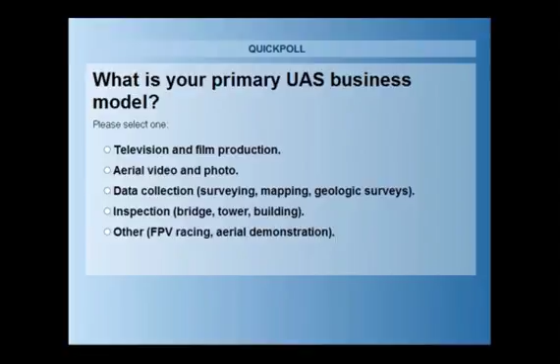So I'm going to close out this poll, and it would appear that over half of you are involved with aerial photo and video, closely followed by 22% in data collection, survey mapping, and then it's spread out evenly among the other, bridge and tower inspection, and television film production. Good stuff, thank you for taking the time to do that poll. We'll have a few more as we go through.

So briefly, we want to go through a little bit of the history of why we got here. I'm not going to go into significant detail, but what I want to bring up is that UAS operations aren't new. They've been around a long time. Quite frankly, you can go all the way back to the 50s and 60s when you look at RC-controlled aircraft. Where it really became popular was in the 70s. You had folks building these from scratch or designing them from kits in their basement, and they would generally form clubs, go out and operate in sparsely populated areas in a club environment. And this worked well for a really long time.

In fact, in 1981, if you take a look at that on the screen, that's Advisory Circular 91-57. Currently we're on Advisory Circular 91-57A, which is kind of the rewrite of this. But all the way back in 1981, the FAA issued this saying, hey, we recognize you guys are flying these aircraft in the National Airspace System, and they're model airplanes, and you're staying away. So we came up with some guidelines and operating standards, not a rule, but certainly some standards that we expected folks to maintain in the RC community. And that worked well. It worked well all the way up until rather recently.

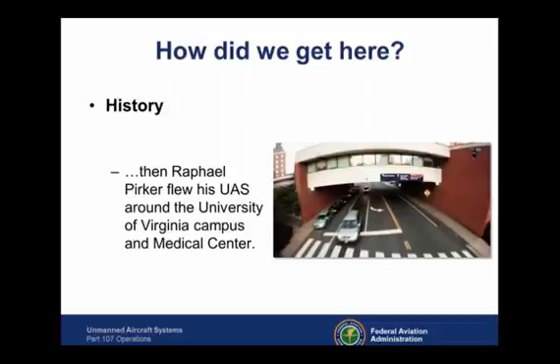That's not necessarily why Raphael Pirker got into a situation, but this is kind of what kicked it off. Mr. Pirker operated his UAS around the University of Virginia campus and medical center, taking videos, swooping underneath and over and around heliports. That's what caught the FAA's attention. And what ended up happening is the FAA charged him with violating quite a few rules under Part 91, based on the fact that we were stating unmanned aircraft systems, or UA, are aircraft.

And of course he fought that and said, no, it's a toy, it's my hobby. So we lost in the lower court. The lower court judge says, yeah FAA, this is a toy, it's not an airplane, you have no standing. Well, the FAA appealed that. It gets up to our highest appellate court, which is the NTSB.

The NTSB affirmed the FAA's position that unmanned aircraft systems are aircraft. That's really the key decision we have right now, and how the FAA got involved in all this anyway. I'm not going to debate this—I know there are probably lawsuits and differing opinions on it, but the facts as it stands right now for law, unmanned aircraft systems are aircraft. You can reference that NTSB decisional order there with FAA versus Pirker.

Shortly after that, Congress enacted a law, the FAA Reauthorization Act, or Public Law 112-95. This captured a lot of UAS hobby operations in it. One of the requirements of Public Law 112-95 was that the FAA establish a means for people to operate UAS commercially in the National Airspace System.

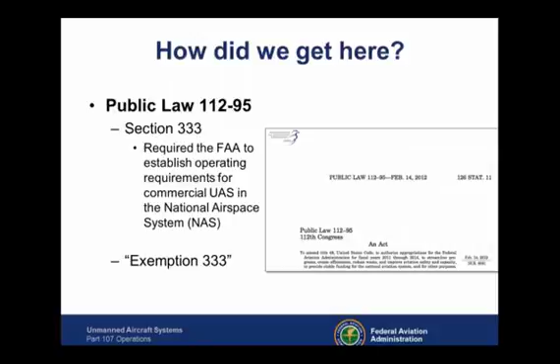The law goes into effect. FAA law doesn't trump congressional public law—it works the other way around. So we had to come up with a rule, we had to come up with something right away, and that's where you got the exemption process, Exemption 333. That was our bridge from Public Law 112-95 all the way over to Part 107 operations. Many of you attending right now may have 333 exemptions, and that was part of that process.

Now, as of August 29th, we have FAR Part 107. This provides for civil, which in our discussion here means commercial, UAS operations in the NAS. It also certificates remote pilots. So that's where we're at here today.

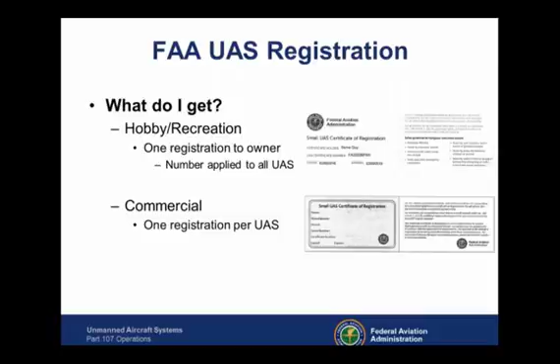Registration is $5 and it recurs every 3 years on your UAS.

So what do you do when you get that number? You have to mark your UAS. No, you don't need 12-inch N-numbers on the side, but somehow that UAS has to be labeled—permanent marker, engraving, any means that will permanently identify that registration number on the UAS. The key with the registration number: it has to be readily accessible, maintained in a condition that is readable and legible upon inspection. You can put it in an enclosed compartment, but only if it takes no specialized tools to get at it. If it takes some sort of unique one-in-a-million screwdriver hex head to open that compartment door, you can't put it there. We're talking tools available to just about anyone with a home repair kit—they have to be able to get at that.

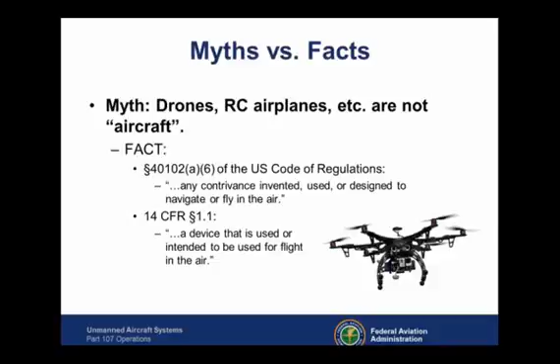I always get somebody in the audience at some point during my live presentations asking, 'So paper airplanes are aircraft and they have to be registered?' That's ridiculous. No, paper airplanes are not aircraft — they cannot navigate in the air, and that's a key part of that. When we get into kites and balloons, we have rules specifically for those, but we're talking about devices used to navigate or fly in the air. They have to be capable of flying in the air. A paper airplane doesn't meet that requirement.

This came up just recently. It's a hot topic, and it's really interesting because it's not unique to remote pilots — it comes across all avenues of pilot certificates. The myth is remote pilots aren't really pilots. You guys aren't really flying airplanes, you didn't take a flight check ride, and a lot of other things like that.

Here's the fact: I'm telling you, yes, you are. You are a certificated airman under Part 107. You have just as much remote pilot-in-command responsibility as pilot-in-command responsibility. You are a pilot. You hold a remote pilot certificate.

You are operating an aircraft in the National Airspace System. The grade of pilot certificate doesn't make you more of a real pilot than anyone else. Pilots always like to say you're not a real pilot until you fly this airplane, or get a tailwheel endorsement, or hold an airline transport pilot certificate. All of it's ridiculous. You completed a course of training, whether self-study or paid, passed an exam, received your remote pilot certificate in the mail - you are a pilot. End of discussion.

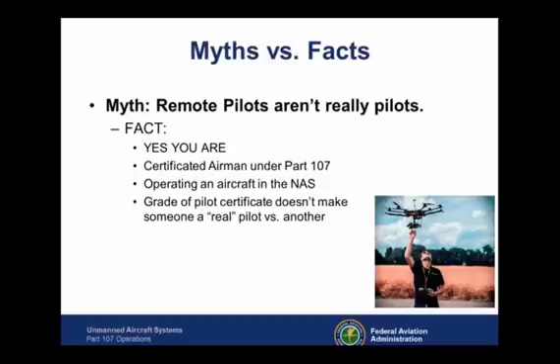Next myth: hobby or recreational operators are exempt from FAA regulations. This is not true. You are not exempt from FAA regulations simply because you self-identify as a hobbyist. You are controlled by Section 336 of Public Law 112-95. You're still flying something considered an aircraft by the FAA, and you are subject to certain regulations.

Part 91.13 covers careless and reckless operation. 101.41 and 101.43 are specifically designed for model aircraft operations in the NAS. So if somebody says, well, I'm a hobbyist, I don't have to follow the rules - that's not correct. There are certainly rules they have to follow. I'm not going to get into them here, but I'd recommend those people check them out.

Here's another good one that will take a little more explanation. The FAA doesn't control airspace below 400 feet, or 83 feet, or 70, or 100, or 500 - whatever the number happens to be. I've heard numbers all over the place. Fact is, we are responsible for the safety of all airspace from the ground up. This includes any airspace defined as navigable, which extends to the surface. Aircraft have to take off and land, and unmanned aircraft have to take off and land too. Therefore, they are navigating in airspace as soon as they come off the ground.

Where this came from, and what everybody likes to cite, is a 1946 U.S. Supreme Court decision - the U.S. versus Causby case. Let me try to explain this a little bit. We're not going to get into a heated debate, I'm sure there are opinions all over the place, but here's the deal: Mr. Causby was a chicken farmer.

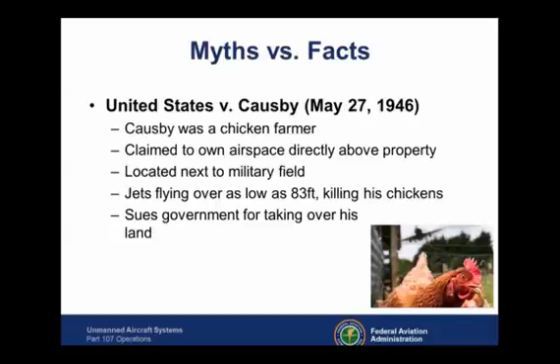He claimed to own airspace directly above his property. His property was located next to a military field, so jets were coming in, taking off, and landing over his property as low as 83 feet. He claimed that was killing his chickens or preventing them from laying eggs, affecting his business, so he sued the government for taking over his land. That last bullet point is key - it was a lawsuit brought on the illegal taking of land. Let's go into this a bit more.

The court ruled that landowners have the right to full enjoyment of their land, referencing immediate reaches of the atmosphere. They agreed this was a government taking because it prohibited the full enjoyment of his land. Again, it's all based on land. When I say it referenced immediate reaches of the atmosphere, it's because you cannot say that a jet flying 35,000 feet over your house is ruining the full enjoyment of your land. So it had to deal with the immediate airspace around it - the actual case had to deal with land. It's a land case.

Since then, there's been 70 years of law and aviation development. Congress has gone on to define navigable airspace to include airspace needed for takeoff and landing. Obviously, UAS operations expand this considerably. In order to claim a taking of land, which was the Causby case, you have to prove aircraft are flying over your land low and frequently, and that it directly and substantially interferes with your enjoyment of the land. It doesn't give you the right to the airspace - you don't own the airspace.

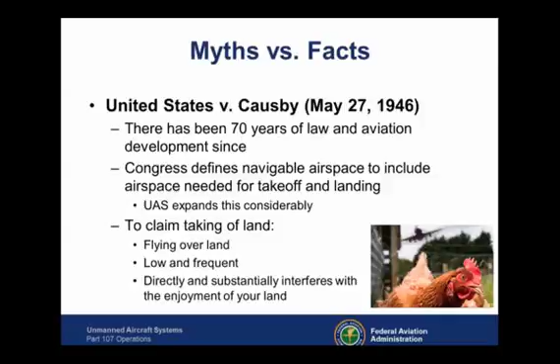It doesn't prohibit the FAA from regulating that airspace, but it does give landowners the right that if something's operating low and frequent, prohibiting or substantially interfering with their enjoyment, they may have a case under Causby. But what happens is people take that as '83 feet, I own the airspace,' and that's not true. It only applies to the taking of land. The FAA has the authority from Congress to regulate navigable airspace.

Moving on, here's another myth: the FAA prohibits transporting property under Part 107.

Here's the fact: yes, transportation of property is permitted under Part 107. The problem is it's not very practical at the moment. Why? When transporting property under Part 107, the transportation must occur wholly within the bounds of a state. That means you cannot transport property from one state or across a state line to another. It has to be within the state.

The UAS must remain within visual line of sight at all times, and that cannot be waived. When we get into the waiver portion of this evening, you're going to see a lot of rules that can be waived, but you cannot waive that if you're transporting property. You cannot operate from a moving vehicle, and you cannot be transporting hazardous materials. So yes, you can transport property under Part 107, however, probably not that practical for everybody's business plans that they really want to do, Amazon included.

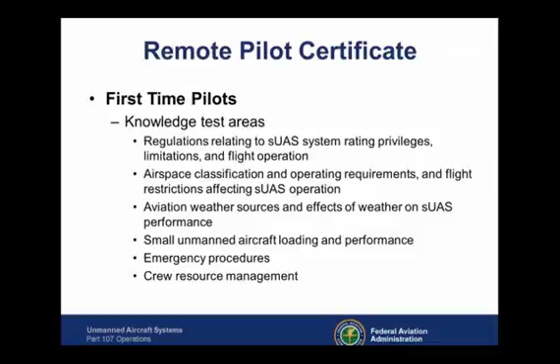That test is going to include areas on regulations relating to privileges, limitations, and operation, airspace, weather, loading and performance of the small unmanned aircraft, emergency procedures, crew resource management, which may be a foreign term to you at this point. Also radio communication procedures may be in there, determining performance of your small unmanned aircraft, the physiological effects of drug and alcohol, which you need to understand, as well as ADM, aeronautical decision making and judgment. You obviously need to know airport operations, and then maintenance and pre-flight inspection procedures. So there's a lot of information you're going to need to know to pass that exam.

Once you pass the exam, and right now we're hovering around 87 to 88% success rate for people taking their exam the first time, that's a fantastic number. It means people are doing their homework. Once you pass that test, you're going to complete your FAA Form 8710-13. We speak in numbers here all the time.

What that really means is you're going to go back into IACRA and complete a remote pilot certificate application. Once the TSA vets your background, you'll receive an automated email from IACRA that allows you to log back in and print your temporary certificate. Later, the permanent certificate will be sent by mail, but that's taking a while. Some people are starting to get theirs now, but it's coming in waves.

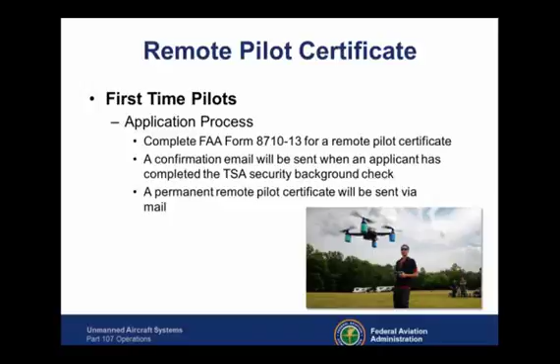The key to remember for first-time pilots or non-current Part 61 pilots is that there's no additional signatures necessary. You don't have to go find a CFI, you don't have to visit the FSDO, you don't have to go find a designated pilot examiner. Complete the application and submit it. Oklahoma City and Airman Records takes care of your vetting and processing of the application.

So another poll here, and this may be one of the last polls we see for a while, but I'm curious to find out how many folks are registered through FAASafety.gov.

All right, we're climbing back up to my magic number again. I'm going to close out the poll because it's not that difficult a choice to make, but 3/4 of you are registered with FAA Safety Gov. That's fantastic news. There are 2 wings credits applying to this seminar.

If you haven't registered through FAASafety.gov, obviously you've registered through Citrix because you're here, but if you have not registered through FAASafety.gov, please go there and find this seminar or webinar. You can search the entire U.S., it'll be on there with the same title, and make sure you register so you can get the appropriate wings credit. I'm not going to do a huge presentation on FAA Wings because for the unmanned aircraft system pilot, the remote pilot I should say,

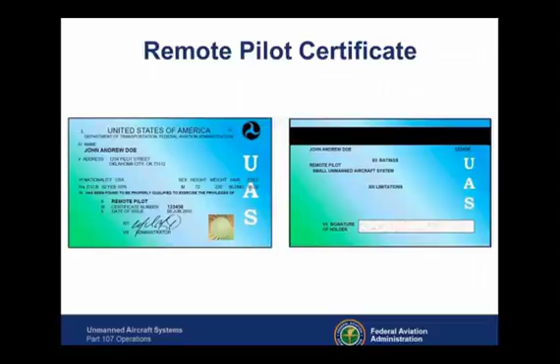That's what your remote pilot certificate's going to look like. I can say for a fact that is what they look like. I don't have mine yet, but I have my temporary. I'm waiting like a lot of people, but I've seen some posted online, and that's certainly what they look like. Again, I want to drive home the point that is an airman certificate, and you hold a remote pilot certificate with a small unmanned aircraft system rating.

You are a pilot. Currency - just because you get your certificate doesn't mean you're done. Periodically, you have to update the required aeronautical knowledge to continue to operate in the National Airspace System. This is done through either a recurrent training course or recurrent knowledge test, and it has to be done every 24 calendar months. What is that test going to be like? I don't know, we haven't issued it yet because nobody needs it yet. We just published the rule.

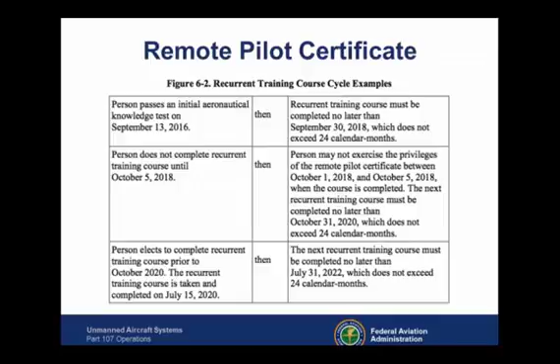But you can take a look at that and see precisely how the recurrent training cycle works: if you pass it on this day, when you need to train by, and what happens if you don't—the clock gets reset. So screenshot that or whatever; hopefully I can get this published after I record it and you guys will see that again. I believe I took this out of Advisory Circular 107-2, so not too hard to find.

The recurrent training course will include applicable regs, emergency procedures, CRM, maintenance, and pre-flight inspection procedures. Again, we don't have the course developed yet, so I can't specifically tell you what it's like. Is it going to be the same as the UAG knowledge exam? Not quite sure—we'll probably have to wait a good year before we see some of that.

All right, so here we go. I hope you guys have your popcorn ready and your favorite beverage in hand, because we're about to get into the meat of this presentation. I do have a planned break ahead, probably another 25 minutes before we hit that mark.

So bear with me as we get into the rules here with 14 CFR Part 107. We are going to go through every rule. For those rules which aren't that clear, or that I felt need to be explained in more detail, I'm going to do that. But some of the rules are pretty straightforward, so we're not going to spend a half hour talking about one particular rule when it's easy to understand.

The first thing, Part 107.1, applicability—so who does this rule apply to? Every one of our rules starts out with a .1 applicability section, and this particular rule applies to registration, airman certification, and operation of small unmanned aircraft systems within the U.S. We're talking civil, commercial UAS operations. It doesn't apply to air carriers, any aircraft subject to Part 101—which includes hobbyists and models—or operations under Section 333.

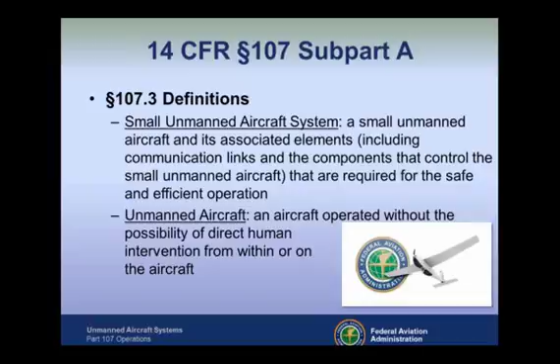We talk about unmanned aircraft systems, small unmanned aircraft system—when we're talking about sUAS or UAS, we're talking about everything involved: the aircraft, the data link, the control station, the flight controls, the computer software required to run it. That is the small unmanned aircraft system, kind of a holistic approach. Otherwise, we're talking about unmanned aircraft—specifically the device that's flying in the National Airspace System.

Visual observer is defined—we're going to talk about this a little bit later on—but a visual observer is designated by the remote pilot in command to help them keep the UA in visual line of sight at all times.

We'll get into this a little bit later on. It's not meant to be a daisy chain extension. So it's not meant to be, I've got a visual observer a mile away, so I'm going to fly it over his head and then go a mile beyond him. I can't see it, but he can. That's not how the visual observer system works. So hang with me, we'll get there.

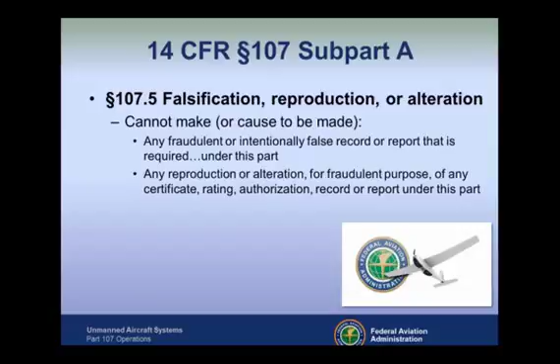107.5 talks about falsification, reproduction, or alteration, essentially saying you cannot do anything that falsifies any record required by the FAA. That's your remote pilot certificate, could be an operations manual you have as part of a waiver, certainly would apply to your waiver or ATC authorizations, or registration. You can't alter or falsify any of that. If you do, you're looking at some pretty serious consequences - denial of application, denial of your certificate of waiver, suspension or revocation, or even civil penalty. We can, at the FAA, fine people for violations of the regulation. From personal experience dealing with cases involving falsification, it's generally revocation.

It's one of the few things the FAA doesn't take lightly. This is highly an honor-based system. We don't have enough inspectors to watch what you do every single day in the field. We are not going to be there for every single takeoff and landing. We expect you to operate as professional pilots in the National Airspace System, and falsification goes against every ethical standard we have as a professional. I've seen the FAA go very diligently after pilot certificates for falsification. So it's certainly something that's real, and it's certainly something that's very uncommon. I should emphasize that.

107.7, as a remote pilot in command, RPIC - I'm going to start using a lot of abbreviations to fit stuff on the screen - you must make available to the administrator your remote pilot certificate with a small UAS rating, any other document or record such as a certificate of waiver, or any test or inspection of the sUAS, to determine compliance with that part. So if an FAA inspector, who is a representative of the administrator, comes up and decides to do a ramp check, you are required to provide that documentation. You can't say, I'm not going to give it to you. This codifies that if you do get visited by an FAA inspector, hopefully it's a positive experience, and they're going to ask to see certain things - this is where they're getting that authority from.

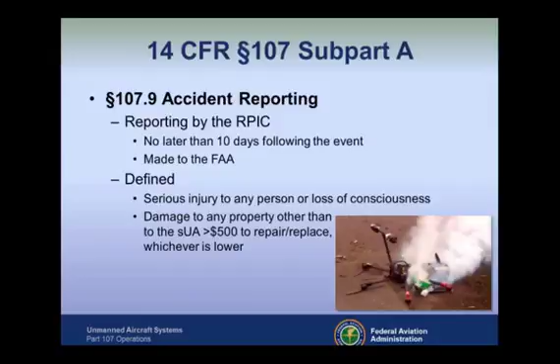We define an accident as any serious injury to a person, loss of consciousness, or damage to any property other than the actual unmanned aircraft that is greater than $500 to repair or replace, whichever is lower. Let me explain that. If the UA hits something that has a value of $300 and it costs $600 to replace it, the value is lower - that wouldn't constitute reporting. It has to be over $500 in value, or over $500 with the repair and the replace.

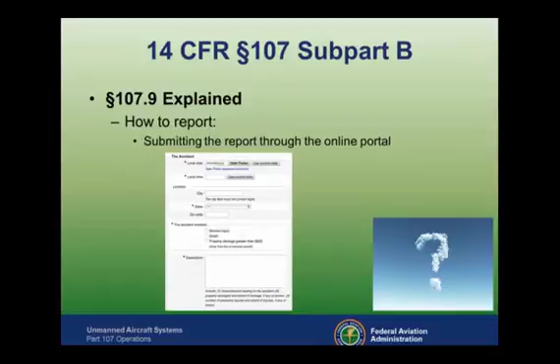If you don't want to call, you can do it online. FAA.gov/UAS, I believe, is our main website, and it has an accident reporting link on that website. You click on it, that window will pop up, and you can submit your accident report that way. Very easy to do. I guess what I would probably do is just submit it online here - it seems much simpler than trying to call somebody and explain it to them. But we do offer that accident reporting portal online.

Another quiz here - this one is going to be a little bit different. I want to see what you guys come up with for an answer. So it wouldn't be an FAA presentation if we didn't have a quiz. So here we go, best of luck to everyone.

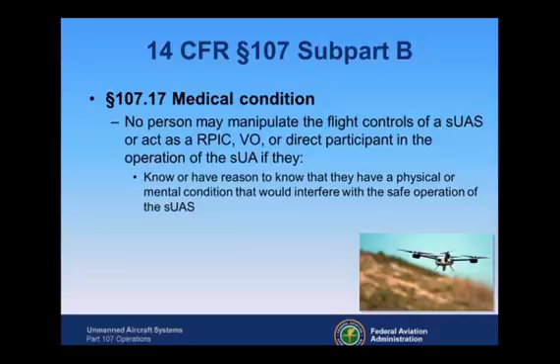You go out—are you physiologically capable of flying that UAS safely? That's what we need to know. So again, a remote pilot in command, under 107.19, must be designated before or during the flight of the small unmanned aircraft. They are directly responsible for and have the final authority as to the safe operation of that small UAS in the NAS. They must ensure it doesn't pose any undue hazard to other people, aircraft, or property, in case that UA loses control for any reason. They must ensure that the UAS complies with all of Part 107.

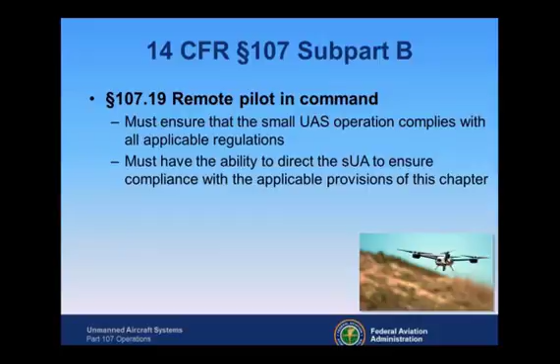If you're the remote pilot in command, you are the captain of that aircraft. You're wearing the 4 stripes. You go to the airline terminal, you see the pilots walk around with 4 stripes on the shoulder—they're the captain, they're the pilot in command. You guys are going to be the remote pilot in command of your aircraft. You must have the ability to direct the small unmanned aircraft to ensure compliance. You're in charge. It all falls on your shoulders.

So here's one of my first explanation points for you guys. The remote pilot in command should have their certificate easily accessible during flight operations. One of the things an FAA inspector could ask if they visit you during one of your operations is to see your remote pilot certificate if you're the remote pilot in command. So you should have that with you—it shouldn't be somewhere in your car or at home. It's something you want to carry with you. All manned aircraft pilots carry it with them at all times. I recommend the same for you guys.

Point number 2: as the remote pilot in command, you're the captain, and as such, you may go down with the ship. That seems a little harsh, but the buck stops with you. If you've identified that you are the remote pilot in command for a particular UAS mission—whether you're flying it or standing next to somebody operating it with the ability to take control if needed—and something goes wrong, we are going to talk to the remote pilot in command. We will talk to the captain. We will want to know why the captain allowed something to happen. It's the way shipping works out, and it's the way aviation has worked out as well.

What 107.19 does allow is transfer of control of a small UAS between certificated remote pilots, meaning you can pass off that remote pilot in command responsibility. In transferring control, both of you must be capable of maintaining visual line of sight without any loss of control—it can't be done where one of you loses sight of it momentarily. The transfer of remote pilot in command responsibility and authority must happen while both of you can see the UA. So you have one pilot designated as the RPIC at the beginning of the flight, and at some point during the operation you can transfer that responsibility and control, as long as it's done in a positive manner so nobody is confused when something goes south.

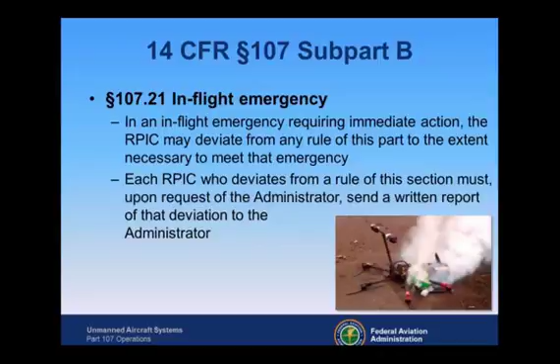In terms of hazardous operation, you may not operate in a careless or reckless manner. Pretty straightforward, not that difficult to understand. You don't want to be endangering people or property or anything like that.

You cannot drop anything from a small unmanned aircraft that creates an undue hazard to persons or property. So can you drop something from a small unmanned aircraft? It would appear so, as long as it's done in a manner that doesn't create an undue hazard to persons or property. We have the same rule for manned aircraft, so it's almost word for word when we took it and parsed it into Part 107.

You can operate your small UA from a moving vehicle, it cannot be from an aircraft. I don't know why anybody would try to do that, but it can't be from an aircraft. And you can only operate it from a moving land or waterborne vehicle over a sparsely populated area, and it cannot be transporting property. This goes back to, yeah, you can transport property under Part 107, but we have some rules that don't really make it easy to do. This is kind of one of them.

So if you're going to be operating from a moving land vehicle, car, truck, or a waterborne vehicle, boat, jet ski, it has to be done over a sparsely populated area, and it can't be done for compensation or for hire. What's a sparsely populated area?

We don't define it. Much to the chagrin probably of many FAA safety inspectors over the years, we have no formal definition of sparsely populated area. We leave that up to the operator to determine. I wish I had a better answer for you guys, but if you're going to say I'm going to operate from a moving vehicle, I've determined this area to be sparsely populated, that's on your shoulders. If the FAA inspector comes out and says, well, this is like the middle of downtown Atlanta, where are you getting that from? That will be up to you and the courts to decide later on. But we do not define sparsely populated area. So you can Google it and try to find some answers. Some lawyers have written about it in different cases, but officially there's no definition for that.

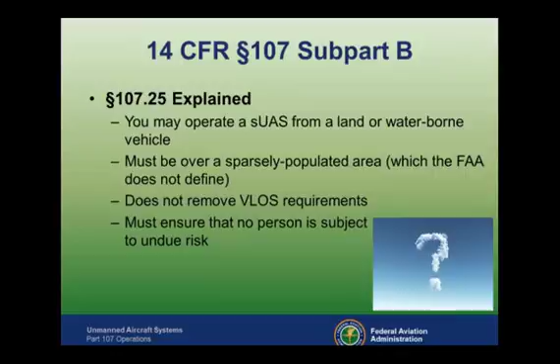So again, you can operate from a land or waterborne vehicle over a sparsely populated area. It doesn't remove any visual line of sight requirements, you still have to maintain VLOS with your small UA. And you got to make sure that it doesn't unfairly risk any people or property or anything of that nature.

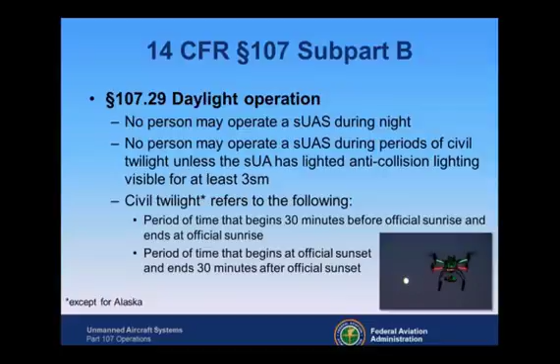Daylight. You may not operate at night. You may operate in periods of civil twilight, as long as your small unmanned aircraft have anti-collision lighting on it that can be seen for at least 3 miles. Civil twilight, as you see on the screen there, talks about 30 minutes before official sunrise and ends at official sunrise, and then beginning at official sunset and carrying on for 30 minutes after that. Folks that might be tuning in from Alaska, it's totally different up there. Sometimes the sun just never sets for you guys, so please check specific rules when we get into the Alaska stuff. But you may operate during the day and civil twilight as long as you have those anti-collision lights that can be seen for 3 miles.

What does that mean? We have no certification standards for small unmanned aircraft, let alone lighting systems. So a lot of people say, well, you got to comply with Part 23 or some sort of aircraft certification requirement. We don't have that. This is a performance-based standard, a performance-based rule, meaning that you just have to demonstrate your lighting on the UAS can be seen for 3 miles or should be able to be seen for 3 miles. That's the requirement. There is no minimum luminosity. There's no specifications for lights. We don't do any of that. It's a performance-based rule. So can you see that from 3 miles away? If so, then you're good to go.

Visual line of sight. Here's another big one here, folks, 107.31. You have to maintain visual line of sight of your UAS, unaided by anything other than corrective lenses. That goes for the remote pilot in command, the visual observer, and anybody manipulating the flight controls. They have to be able to see the unmanned aircraft throughout the entire flight to know the location, altitude, attitude, direction. They have to be able to observe the airspace for any hazards, other aircraft, perhaps birds, and you have to ensure that the aircraft doesn't endanger life or property of another.

That has to be done by the remote pilot in command and the visual observer. You can't pass that off. It has to be within visual line of sight at all times. So throughout the entire flight, the ability to do what I just talked about must be exercised by either the remote pilot in command of the sUAS or a visual observer.

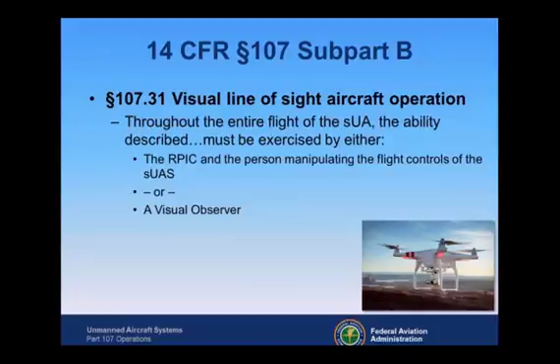So if a visual observer is used during that operation, all the following requirements must be met. The remote pilot in command and the visual observer must maintain effective communication with each other at all times. That means I have to be able to talk to you, you have to be able to talk to me. That can be done electronically, walkie-talkie, cell phones. We don't get into too much detail on that, but we do specify effective communication. So whatever communication medium you're going to use between the remote pilot in command and your visual observer, it has to work. It has to be effective.

The remote pilot in command must ensure that the visual observer is able to see the UA in the manner specified previously. Again, it has to maintain visual line of sight. We don't have a rule that permits beyond visual line of sight operations.

Coordination between the two is outlined in 107.33. This is coordination between the visual observer and the remote pilot in command, designed to scan the airspace where you're operating your small unmanned aircraft to identify any potential collision hazards and maintain awareness of position through direct visual observation.

That ties to me as a remote pilot looking down, temporarily adjusting something for some reason. I've got my VO who's watching my UAS, whether it's in hover mode or tracking a GPS track. I have that ability to maintain visual line of sight because I can always look up and see it, but they are physically eyes on the bird at any given time.

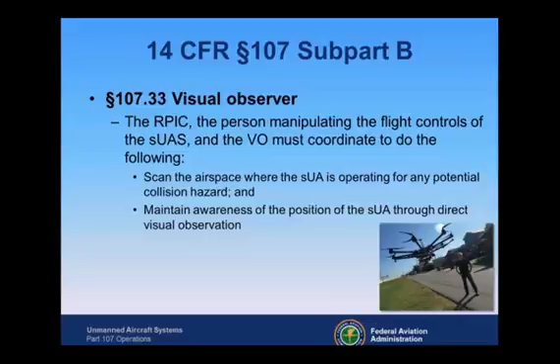Unless properly certificated and equipped, visual observers cannot assume remote pilot in command responsibilities. You can't pass off your RPIC duties to your visual observer unless they happen to be a remote pilot, have that certificate, and accept that responsibility. So they assist you - if you go eyes down, the visual observer is there to assist. You still, as remote pilot in command, must be able to see your unmanned aircraft within visual line of sight at all times. This doesn't relieve anybody of that.

Effective communication must take place. I don't necessarily care how you do it, but you have to have effective communication with the visual observer, because if the VO is far enough away where they can't shout effectively due to highway noise, and you go heads down while they see something dangerous happening, they have to be able to communicate with you instantly, whatever means you use. That could be voice, handheld radio, any method that creates effective communication without creating a distraction. Texting probably isn't the best idea to maintain effective communication between a VO and the RPIC.

In terms of operating multiple small unmanned aircraft, you may not. A person may not operate or act as remote pilot in command or visual observer of more than one unmanned aircraft at the same time. This is going to be one of those rules that's waivable - we'll get to that in a little bit.

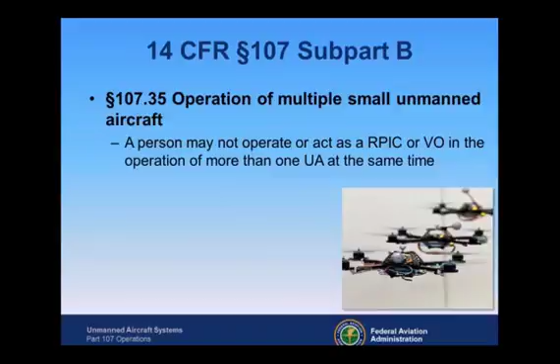All right, pretty exciting stuff there. I'll give you guys a second to read that, and jumping forward.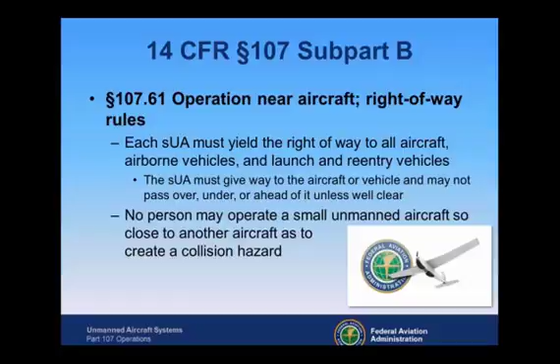If you're going to operate near aircraft, here are the right-of-way rules under Part 107. You must, as a small unmanned aircraft remote pilot in command, yield the right of way to all aircraft, airborne vehicles, launch and re-entry vehicles. You have the responsibility to get out of the way. In terms of operating near them, you may not pass over, under, or ahead of it unless you are well clear. What does well clear mean? Look at it from a safety standpoint - you want to be so far away that it's not going to create an undue hazard. Be well clear. You may not operate so close to another aircraft to cause a collision hazard. Pretty self-explanatory on that one.

Operating over people - this is a good one everybody likes to talk about, especially since our administrator mentioned it was one of the first rules we're going to be looking at short term to potentially modify. We'll have to see. But 107.39 prohibits operating over a human being - apparently aliens are okay - unless that human being is directly participating in the operation of the small unmanned aircraft, or they're located under a covered structure or inside a stationary vehicle that provides reasonable protection in case the UA came down on their head. The first bullet point is where everybody starts to diverge in terms of who is directly participating in the operation of that small unmanned aircraft.

So here's what we define - this comes straight out of Advisory Circular 107-2, one of the handouts you can download. People directly involved with the operation of the small unmanned aircraft system are the remote pilot in command, or another person manipulating controls as provided by rule, the visual observer, or any crew members necessary for the safety of the small unmanned aircraft system operation as assigned and briefed by the remote PIC.

One of the questions we get a lot: what about actors? What about the movie talent, whoever happens to be involved? Are they participating in the operation because we're filming their scene with the UAS? The way this reads is no - the actors or talent involved are not directly participating in the operation of the small unmanned aircraft system.

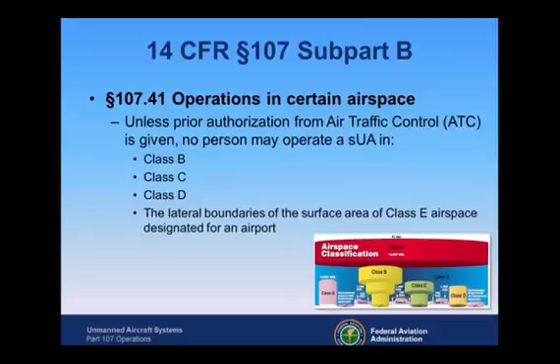Operating in the vicinity of airports, you may not operate in a manner that interferes with operations at traffic patterns at any airport, heliport, or seaplane base. Notice this is different from a lot of what Exemption 333 allowed and what's required of hobby operators. Your typical Class G airport does not require ATC authorization to operate around; however, you must maintain compliance with 107.43.

Let me explain a little bit. Although it doesn't require notification to the airport operator, it's best practice to do so. One of the first things I mentioned at the beginning of this webinar was that it's on your shoulders now. It's really up to you guys to determine how the future of UAS is going to work with the FAA and with public perception. So everything you can do to make people understand what you're doing and how you're complying with the rule, and how you're doing this safely, is going to benefit the entire industry. I really can't emphasize that enough.

Just because a rule says you don't have to tell the airport operator you're going to be flying a UAS near the airport, it's still not a bad idea to let them know. Open up that dialogue with them, start that communication. You might be surprised how well you're received.

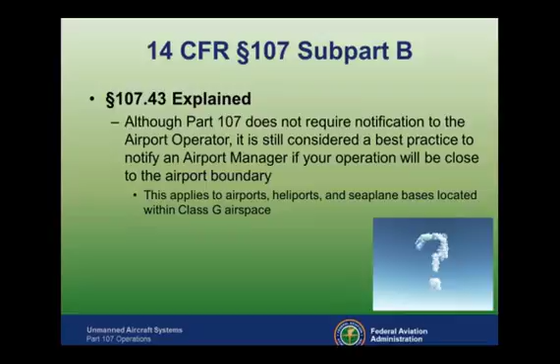You have to avoid operating anywhere the presence of your sUAS may interfere with operations. This includes approach corridors, taxiways, runways, helipads, and you still have to give right of way to all aircraft, including aircraft operating on the surface. Just because something's taxiing by doesn't mean you've got the right of way—you always have to give way.

One of the explanations given in Advisory Circular 107-2 is this: if you're hovering your unmanned aircraft 200 feet above a runway, and there's no other airplanes around and you've done your due diligence, and now an airplane taxis up and is holding short of the runway, and they cannot take off because you're hovering there—in effect, you have interfered with operations at the traffic pattern at an airport and would be in violation of 107.43. So before you go carte blanche operating into airports in Class G, heliports, or seaplane bases, have a very good understanding of how that airport operates.

How do you do that? Contact the airport operator, open up that dialogue, open up that discussion, be safe.

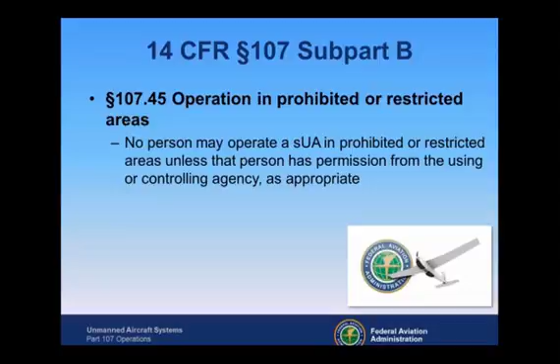Operating in prohibited or restricted areas isn't that different from manned aircraft. You may not operate a small unmanned aircraft in prohibited or restricted areas unless you have permission from the using or controlling agency as appropriate. For folks not really in tune with how that works, what is the using agency or controlling agency?

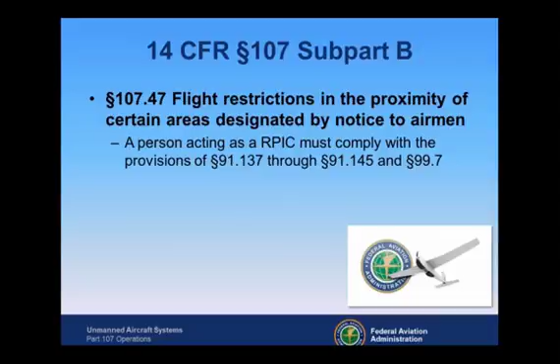This rule 107.47 is the TFR rule. Essentially we identify, like you're now starting to get used to, we redirect you to part 91.137 through 145 and 99.7, but really it amounts to TFRs. So you may not operate a UAS in TFRs, whether it's in the vicinity of a disaster hazard area, national disaster areas in the state of Hawaii, emergency air traffic rules, flying too close to the President of the United States or other dignitaries, flying too close to where they're doing space launches off of Cape Canaveral, or we have a rule for abnormally high barometric pressure conditions. There's also the kind of permanent TFR that exists, which is the stadium TFR, people like to call it, that exists over certain stadiums of a seating capacity and type of venue.

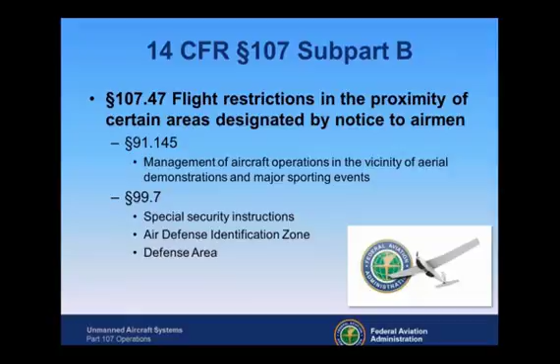Regardless of which TFR it happens to be, no UAS operations are permitted inside a TFR. I got a couple more on here, but essentially they're saying the same thing. TFRs, no fly. If you got a TFR active in the area, you're not going to go flying that particular day. And I'll show you how to find out here later on.

You are required to do a pre-flight on the UA. You can't just unpack it out of its shipping crate or protective case and launch it. You have to, as the remote pilot in command, assess the operating environment, consider all the risks to people or property in the immediate vicinity, on the surface, and in the air. These are things that you have to do prior to flight, not just one flight, all flights.

You have to complete this. Your assessment must include local weather conditions, airspace, and any flight restrictions, i.e. TFRs, the locations of people or property on the surface, and any other ground hazards which may play a role in your operation. And you must ensure that everybody directly participating in the UA operation is informed about the operating conditions, emergency procedures, and so on and so forth.

This gets back to people who are participating in the direct operation of your small unmanned aircraft, back when we were talking about operating over people. This is the briefing that you have to give them. You have to ensure that anybody participating in that safe operation knows the operating conditions, emergency procedures, contingency procedures, roles and responsibilities, and potential hazards. That's your responsibility as a remote pilot in command.

There's a lot of responsibility on your shoulders. You have to ensure that all control links between the station and the unmanned aircraft are working properly, and you must ensure that it has enough power to fly for your intended mission. This is similar to manned aircraft pilots, making sure there's enough gas in the tank to get where they're going.

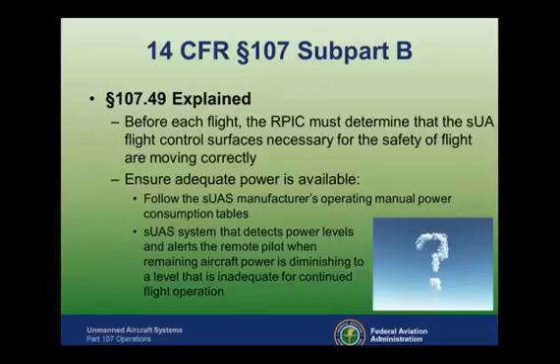In addition to all that, make sure the device is capable of flight. Do the propellers operate as they should? Does the control system operate as it should? Do you have adequate power? So on and so forth.

Make sure whatever you have at the bottom doesn't fall off, and make sure you have documentation with you. If you're operating under a waiver, you're going to want that waiver with you. You're going to want your remote pilot certificate with you, and you're going to want the aircraft registration with you. These are all things you have to have ready to go, the documents you need with you.

Operating limitations - here's the nuts and bolts of actually flying the device. We limit it to a ground speed of no more than 100 miles an hour, and you have to have at least 3 miles of visibility observed from the location of the control station. So wherever you're at, you have to determine that your flight visibility is at least 3 miles.

You cannot fly higher than 400 feet AGL unless you're within a 400-foot radius of a structure. Then you may fly up to the top plus 400 feet above that structure's uppermost limit. If the radio antenna is 1,000 feet tall, you may operate within a 400-foot radius of that up to 1,400 feet AGL. That's what this rule permits you to do.

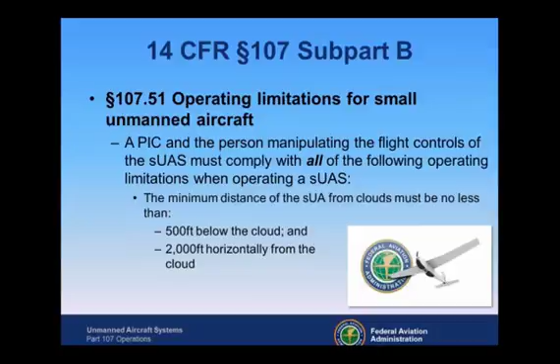You do have to maintain cloud clearances. You have to be at least 500 feet below and 2,000 feet to the side of any cloud. You cannot fly above the cloud.

So why do we have these? Among other things, we want you to have the ability to make adjustments, to identify hazards and react to them, to make sure you're maintaining safety and taking appropriate actions.

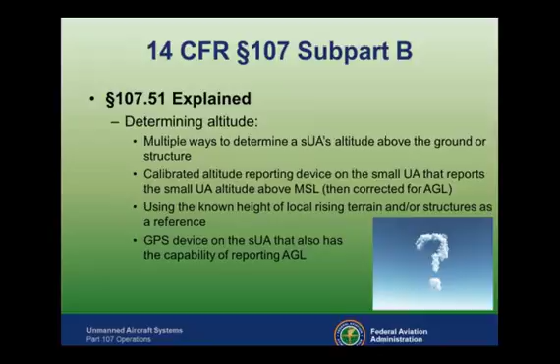There are a lot of different ways to determine ground speed. If you own and operate a UAS, you know the best way for you to determine it, but that's the controlling factor - ground speed. Same thing with altitude. Most of these references are in AGL, above ground level, but you really want to understand the difference between MSL and AGL altitudes. If you don't, it's time to hit the books. But again, determining altitude is probably best left to you guys, since you know the UAS system best and how it relates that information to you.

Cloud clearances - how do we do that? Your eyeballs are probably the worst, most uncalibrated tool to determine cloud clearances. The best way is to obtain local weather reports in an aviation format. Where are the clouds at? What are the bases of the clouds at? Because if I know the bases are at 1,000 feet, I know I have to be 500 feet below that, so I'll be limited, even if I'm within a 400-foot radius of a structure, to 500 feet AGL max because of where the clouds are sitting.

Don't forget your local laws and regs. Just in the state of Minnesota, I can tell you they're going to require that you register your UAS with them, that you have a commercial operating license with them, and that you prove minimum insurance requirements to them. The FAA does not require insurance, and we don't require a commercial operator license, so to speak. We issue registrations for $5, and we issue remote pilot certificates - that's our requirement. But every state has its own set of rules, and if they don't have them now, they probably will very soon. Check with your state - just because you met all the FAA requirements doesn't mean you've met your state requirements.

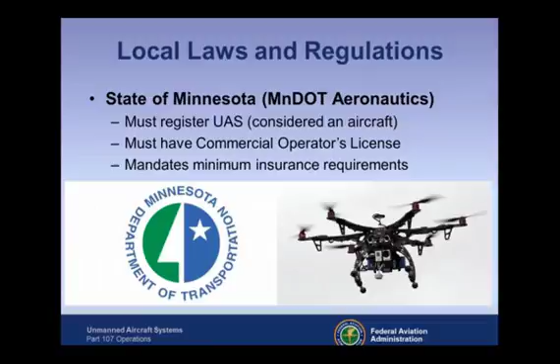I can't emphasize enough, we don't regulate privacy at the FAA. That's not what we do, it's not what we have regulations for. But many cities and states do, and they have very specific privacy laws. You're kidding yourself if you don't think they're talking about how to control privacy with drones right now, because they are. I've been involved with legislatures here in the state of Minnesota, and it is a topic being discussed right now. So know your local laws.

Extremely, extremely important. All right, one more quiz here as we close out this section, and this should be an easy one for you guys if you've been paying attention at all during the first portion of the presentation.

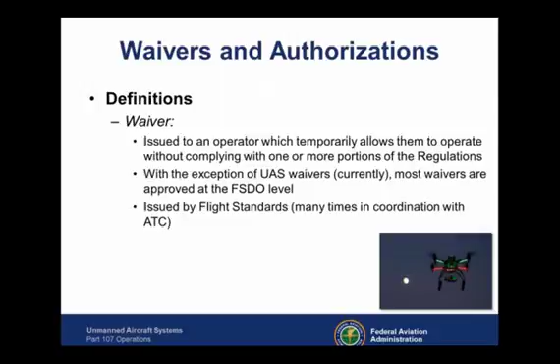Eventually, they're going to be issued by the FSDOs. I don't have a timeline when that's going to happen. A lot of waivers involve coordination with ATC. Just because Flight Standards issues the waiver doesn't mean we don't talk to air traffic control.

You have certificates of authorization. Those are issued by air traffic control, and they're issued to an individual or an entity for operating as, generally speaking, public use, or a lot of people who had 333 exemptions received a certificate of authorization.

COA, or COA, depending on how you like to pronounce that abbreviation. This particular authorization does not come from Flight Standards. A COA is issued by air traffic. Yes, air traffic is part of the FAA, and you're getting an FAA COA, but it's not a Flight Standards COA. Flight Standards issues the waiver and the exemption. Air traffic issues the COA.

For all practical purposes, and certainly for our discussion here, if you're operating under Part 107, you're not going to get a COA. You're not going to need to apply for a COA.

So let's talk about what you will apply for, and that is an ATC authorization. You remember that rule that said you cannot operate in certain airspace without ATC authorization? This is what we're looking at. You are looking at receiving ATC authorization. It's required prior to entering Bravo, Charlie, Delta, or, my own little term again, E to the surface airspace.

It's officially submitted by your request through the online portal. We're going to kind of go over that here.

UAS operators should not contact air traffic control directly to obtain ATC authorization. I have heard reports of that working out. People have tried it. There's nothing to prevent you from doing it, but I will tell you as of last week, I've heard from everyone that all the air traffic facilities are saying, go to the portal, go to the portal, go to the portal. It seems like air traffic and flight standards are now on the same page with this. So please do not contact the air traffic facility directly. If you want ATC authorization, it's done through our portal.

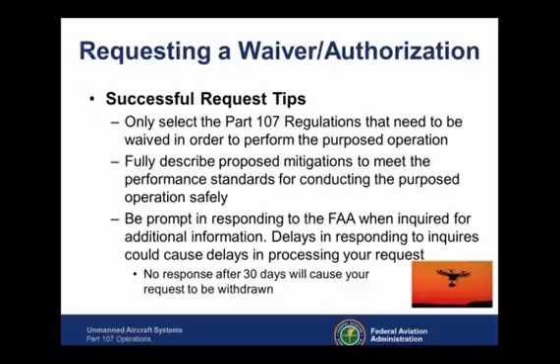So if the FAA is processing your waiver and they request additional information, don't delay. Write us back right away and say, here's what you need to know. It's back in your court. After 30 days, if we don't hear anything, we kick your request out, and that's a horrible thing to have happen. So be responsive when we ask you for more information.

When you're submitting that waiver or authorization request online, it's one portal for two things. We didn't do a whole lot of favors on deconfusing it for you, but we have one portal for the two different types of things, waiver and authorization.

Regardless, the responsible person has to be identified. That is going to be the official holder of the waiver. The responsible person ensures the operation is conducted safely, observing the provisions of the waiver or authorization, has ongoing knowledge of the operation of the small unmanned aircraft system when it's happening, and they're not required to hold remote pilot certification. This is the responsible person for the waiver, not for flying the unmanned aircraft under the waiver.

The responsible person can be the representative of an organization. If so, you want to put the name of the organization into the box that's identified. We have to have a responsible person identified because we have to have a point of contact at your company that we can get a hold of if something changes or a waiver needs to be amended or altered in any way. That responsible person is going to maintain a list of pilots as well as the types of UAS operating under the terms of that waiver or authorization.

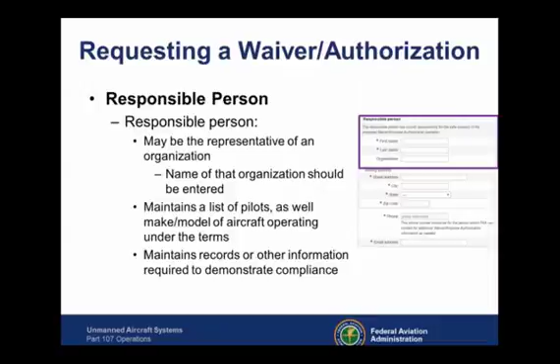They'll also maintain any records or other information required to demonstrate compliance with the waiver or authorization. So if the waiver or authorization requires you to maintain a certain document, the responsible person is the one in charge of maintaining that document.

Mailing address, pretty straightforward. The thing you want to remember, it cannot be a post office box. It has to be some location where we can send certified mail. Certified mail, yes, that's where the postman delivers it. You have to sign for it before they walk away. So it has to be somewhere where certified mail can be received.

We do require a phone and email, particularly when we're talking about airspace authorizations, easy for me to say. But we have to have a phone number and email of the responsible person for that waiver or authorization.

When you get to the remote pilot section, you're going to put in the remote pilot in command who's going to operate under that waiver. Not necessarily all the different remote pilots, but the remote pilot in command. The head cheese, the captain, their name goes there.

For an airspace authorization, the responsible person is required to maintain the current list of pilots and the remote pilot certificate number used in their operation. This list that's maintained has to be presented to the FAA upon inspection. Remember that one of those first rules we went through about all the things that you'd have to produce if a FAA inspector visited you? This would be one of them.

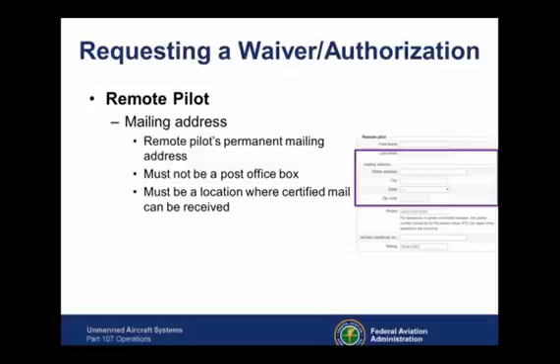Mailing address, same requirements you have for the responsible person, you have for the remote pilot in command identified here. Phone and email, same thing.

Pay particular attention to ATC authorization requests, because whatever phone number you put in there for an ATC authorization request has to be one that you will answer during the flight. So if you say I'm available at 555-555-5555, ATC is going to pick up the phone because they need to get a hold of you. You've got emergency aircraft inbound. That better be the phone number that you answer, because you're operating or somebody next to you is operating a UAS.

When it comes to the airman certificate number, do not enter your Part 61 pilot certificate number if you have that. This is your Part 107 remote pilot certificate number, and if you don't have it yet, if you're like me and you've got one of these temporary certificates, enter pending. That's okay. You can enter pending in that airman certificate number.

For the small UAS, you're going to enter the manufacturer, the model, and the registration number. Remember, under commercial operations, each UAS has to have their own individualized registration number. You can add more than one UAS. We conveniently added a little button there for you. You can click.

So now, to specifically request a waiver, those were general guidelines for requesting either one. Whether you're going to request a waiver or an authorization, you're going to need to fill out that top part. Now we're going to get into the specifics of requesting a waiver.

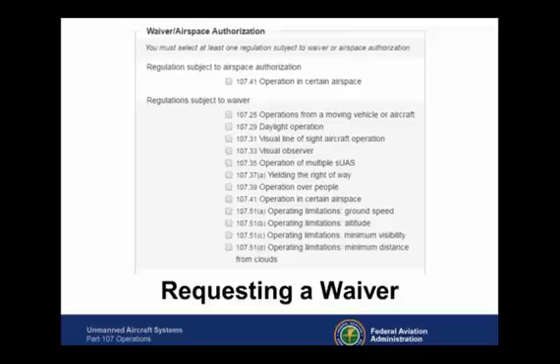You have one box when you request your waiver/airspace authorization. There are two sections: ATC authorization and waiver. Again, ATC authorization is this part here. If you're looking to receive authorization to operate in certain airspace, that's the one you want to check. If you're looking at getting a waiver for a particular regulation, this is the one you're going to want to check. Know the two sections. Select the regulation you want. That is the list in totality of all the rules that we allow subject to waiver.

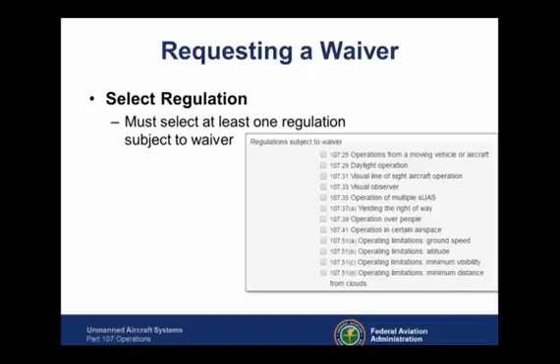You're going to need to put in times. This is for a waiver now. Think waiver. So, the date and time the operations are scheduled to begin and end.

If you're going to conduct multiple flights over a period of time, enter the start date and enter the date that would potentially be the last day you operate.

Waivers may be approved up to 4 years. Again, this is not an authorization, this is a waiver, and a waiver may be approved for a period up to 4 years. Think of a waiver for daylight operations. You want to operate at night, we can approve that waiver for your night operation to last 4 years. So the idea of, I can't believe I have to submit a waiver every single time I want to fly at night 90 days in advance—everybody relax. Submit it. It may take a few days, it might take a couple weeks to get that initial waiver, but we have the ability to issue that waiver for a valid period of 4 years.

So the idea is we want to try to make it as effective as possible for you guys to conduct your business. You'll want to select the appropriate time zone as well.

Proposed area operations: you want to have a detailed description of the geographic area, boundaries using street address or easily identifiable landmarks, and distance and direction from the nearest public airport. If site specific, provide the center point of operation in the latitude and longitude box.

We haven't really started approving waivers yet that I've seen, unless some came out earlier this week. I've been a little bit busy, so I haven't tracked it specifically as I'd like to. So I don't know how this works if you want to, say, receive a certificate of waiver for the entire United States. I'm not sure how that works yet, so I apologize, I don't have that answer for you guys.

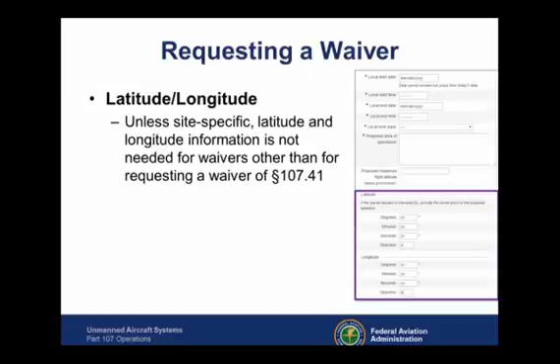Unless it's site specific, you don't need to put in lat/long. Other than for a waiver of 107.41, like if you're requesting a waiver so you do not have to comply with ATC authorization, you would have to put in latitude, longitude information, but other than that, it's not necessarily required.

Finally, submit it. You got to click on the I'm not a robot, you're not some sort of cyborg sent to destroy mankind, click submit, and away it goes. You may not get something back right away. It says congratulations, you've submitted a waiver on the FAA. We're all proud of you.

The system is new. We're doing our best to make sure it functions well, but there are going to be some growing pains, some hiccups, so bear with it. If you don't get a response back right away, hang tight. I know that they have given tracking numbers to people, and I know some people are clamoring for their tracking number, so there's a little bit of a lag in there. Again, this is all pretty new—August 29th is when this started happening.

So what are these performance-based standards? What do I have to identify to the FAA to move forward with my waiver request? We may issue certificates of waiver authorizing deviations from any rule in 107.205 if the UAS operation can be safely conducted under the terms of that certificate of waiver, COW. Your request must contain a complete description of your operation, the justification that establishes the need for the waiver, and that it can be conducted safely under that term.

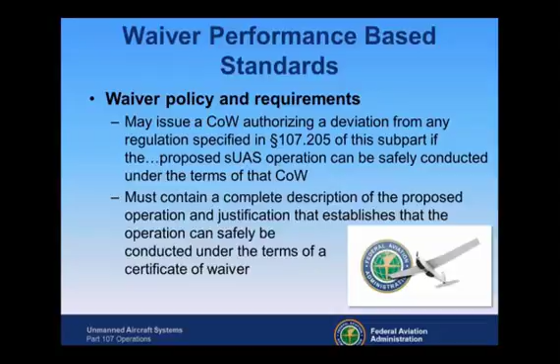We're not just going to be handing out waivers because you think someday you might decide to operate maybe at night. If we're going to waive a rule—and this isn't something we're making difficult for UAS, it's the same for manned aircraft—there has to be a specific reason why. The rule is in place to ensure safety. What you're asking is to not comply with that rule, so we want to know why. You're going to need a legitimate reason. Once you receive that waiver, you may deviate from the regulations of that part to the extent specified in your waiver. Simple as that.

If there are conditions and limitations in your waiver, you must comply with those as well. All of them, not just one or two, you must comply with all of them. So here's how we do it.

If you want to receive a waiver for operating from a moving vehicle or aircraft, you have to demonstrate a method to ensure you evaluate the area for hazards, analyze the risk to people and property, and control or eliminate those risks. You have to ensure visual line of sight is maintained from a moving vehicle, that everybody involved is free from distractions, and that any lost data link procedures account for the dynamic location of the RPIC. Dynamic location, meaning you're not standing in one spot — you're in a car moving down a road, or maybe in an airplane if you're requesting that waiver. You have to ensure that.

By the way, these performance-based standards are all available in one of the handouts. So let me pull up my handout list — I title it Performance-Based Standards, there you go. You can download that if you can't capture all this on the screen, because I'm going to go through this a little bit quickly in the interest of time.

The other one is daylight operation. You want a waiver for that? You have to be able to maintain visual line of sight during the darkness hour. You have to have a method to avoid other aircraft, people, or ground-based structures. You have to know the position, altitude, and attitude of your small unmanned aircraft, and you have to make sure anybody participating is aware of any visual illusions that occur at night or any physiological conditions which may degrade night vision. Again, we specify this in that handout. So if you're going to request a waiver for daylight operation, these are the bullet points you'll need to identify to the FAA and how you're going to do your operation.

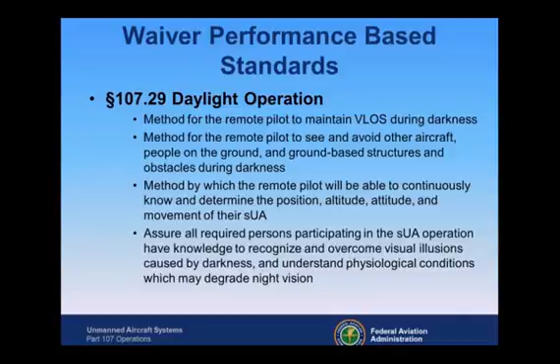Excuse me, five bullet points — there's one more. You have to be able to increase the conspicuity of the UA to be seen at a distance of 3 miles unless something is in place that avoids all non-participating aircraft. I'm not going to go too much into that, but I wanted to give you an idea of what our performance-based standards are.

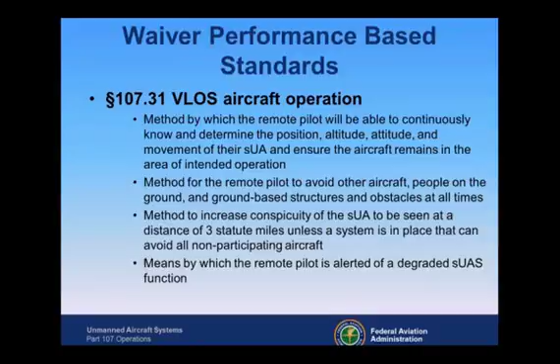You want to operate beyond visual line of sight? Here's your performance-based standards. You're going to see a lot of these standards repeat themselves throughout all these different waivers, but this is another way for you to look at something and have a step ahead when you make that waiver application. You'll say, I know I need to do this because it's a performance-based standard, so I'm going to put that in. Every little bit helps — every little bit you do on the front end speeds up the process on the back end.

Again, you have to ensure all required persons participating have relevant knowledge of the UA and that it's not operating within visual line of sight.

We waive 107.33, but there doesn't seem to be any good reason yet to waive that. So we have no performance-based standards to waive the visual observer requirement. Because visual observers are not required, there's not necessarily any good reason to waive it unless you're combining it with another waiver. As a standalone it doesn't make sense, but in combination with another waiver, it would make sense for you to not have a visual observer. Again, I'm not sure why we have that, but it is there.

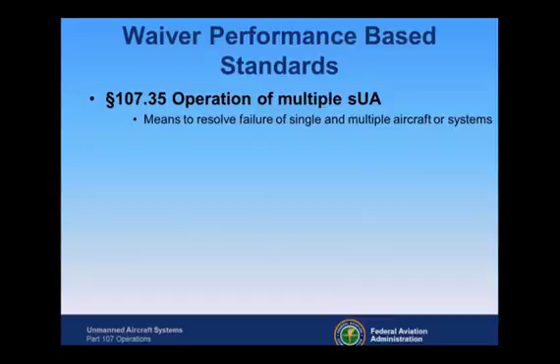You can apply to waive the rule saying you can only fly one small unmanned aircraft at a time. If you're going to do that, you have to have a means to resolve failure of single and multiple aircraft or systems. That's what you have to somehow identify to us here at the FAA.

We can waive operating near aircraft, and for some reason we can waive right-of-way rules. If you're going to waive the right-of-way rules, you have to have a method for the manned aircraft pilot involved in the joint operation to detect and avoid you. You can't just apply for this and say, okay, I've got this waiver, every aircraft has to give way to me in my super UAS. It's a joint involvement with the manned aircraft.

Operating over human beings — here we go. I'm going to explain this one because it's probably the most questioned one we have. If you want to operate over humans, you can apply for a waiver.

That waiver application must identify that you have a method so that ensures any malfunction doesn't cause injuries to non-participating persons on the ground. You have to have some way to keep people safe underneath you. You have to mitigate risk to non-participants through operational risk assessment, testing data, addressing design features, with software, whatever it happens to be on your UAS that you believe is a good tool to prevent hurting people. You want to identify that.

You need to address the risk from rotating parts. Those blades, when they come down, they will cut you, as some of you may already know, but they certainly have sharp edges, and we have to have a way to address that risk of exposure from those.

You have to be able to show that the remote pilot in command or whoever's manipulating controls of this small UA has adequate knowledge, experience, and ability to safely operate that UA over people, including recent flight experience from the last 90 days. So what that means to me is if you haven't flown a small unmanned aircraft system for 3 months and you apply for this waiver, you may not get it.

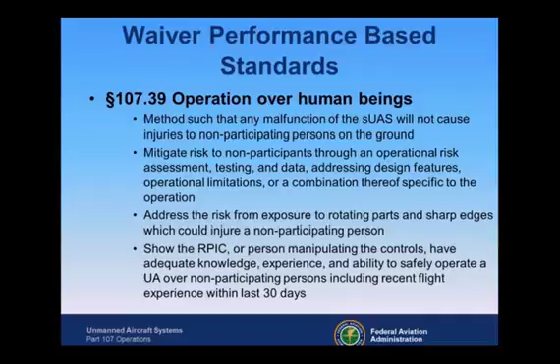Now, operating in certain airspace, this is the ATC waiver. It's going to be a tough one to get. That's the vibe I'm getting, and I'm probably pretty close to that. So you have to have a method to ensure that you're going to operate safely and efficiently without obtaining clearance from air traffic control. You have to have a way to be contacted by air traffic control because you are in their airspace. But really, for this one, you're going to have to explain why our authorization process won't meet your needs. You have to say it's too burdensome or there's some reason, and I quite honestly can't think of any right now. Maybe you guys can, but you have to demonstrate some sort of reason to say that, hey, look, the authorization process doesn't work for me.

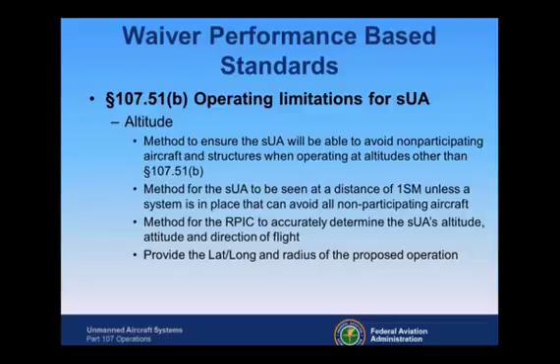I can't emphasize enough, if you're going to request a waiver, be familiar with the performance-based standards. Download that handout I have, so when you submit your application, we don't have to ask you all this stuff. We don't have to, say you didn't identify that you can be seen at least a 1 mile distance, so now we got to ask for more information. If you have everything up front, the process goes quicker.

You can get a waiver for minimum visibility. You want to operate with a mile visibility instead of 3 miles as required by rule? You can get a waiver for that. Performance-based standards is going to identify what you need to let the FAA know and how you're going to comply with certain requirements of that performance-based standard.

Cloud clearances. You can operate closer than 500 feet below or maybe closer than 2,000 feet horizontally to a cloud. Again, performance-based standards. You have to have these situations, or these methods, identified in your application to the FAA so they can say, they want to operate closer to a cloud, that's fine. They've met these requirements. We're going to issue the waiver.

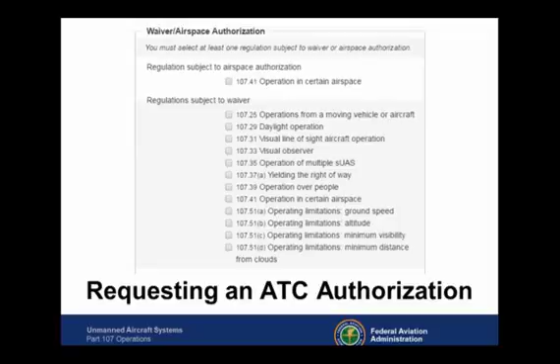Now, the other half of that box, the ATC authorization, and this is where I want to clear up maybe a little bit of miscommunication here that the questions have been coming through. You only have one box to check for an ATC authorization. And I'll state it again. The only authorized way for you to receive clearance to operate in Bravo, Charlie, Delta, or within the lateral boundary, whatever, Class E to the surface, is through our online portal. If you call ATC directly, they should be telling you that. I'm certainly telling you that from Flight Standards. Now you guys know, and that is the only process.

We are not approving airspace authorizations until October 3rd. That'll be the first date we start to issue airspace authorizations, and it will be for Class Delta and Echo to the surface airports. The next big date is October 31st, for Class Charlie airports. The last big date will be December 5th, for Class Bravo airports. But nonetheless, Bravo, Charlie, Delta, Echo to the surface, you must submit your ATC authorization request online.

So I'm going to explain a little bit more about that here. You check the box that you're requesting an authorization. You're not requesting a waiver to operate in ATC Class Delta. You're requesting an authorization. You're going to need to specify the maximum altitude in AGL. You must complete the beginning portion in the same manner as requesting a waiver.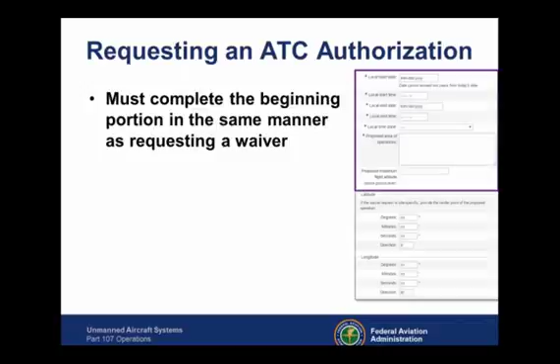So this is kind of where we get into the efficiency. It's a little bit confusing because it's one form, but it's more efficient because it's just one form you have to fill out. But now we're talking about authorization, not waiver. You will need to put in the latitude and longitude.

The reason we do this is because I'm pretty sure at this point every Bravo, Charlie, Delta, Echo to the surface airport has grid mapped their airspace. What I mean by that is air traffic has mapped out areas where, for lack of a better term, automatic authorization will happen. Don't get all excited because it's probably not going to happen right away. But in my earlier example, if you submit an ATC authorization request and your latitude, longitude, and altitude puts you in an area that's 4.8 miles away from the airport center in Class D airspace, no higher than 20 feet AGL, the chance of a manned aircraft being 20 feet AGL, 4.8 miles away from the airport is extremely remote, unless it's probably crashing.

So the idea is you're going to submit this online. It's going to be checked against that grid map. And these are all our goals. This is not something that's happening October 3rd. These are our goals - that if you fall into that area, you're going to get your authorization back

instantly, but we're the federal government, so maybe not super instantly as you may know the word, but it would be quick. I've had it explained to me on a few different occasions that the theory is you're standing at the spot you want to do your UAS operation that's within Class Echo to the surface, let's say. You submit your application right on your mobile device. You go to our web portal, you put in the data. It checks it against that grid, processes it through the system, sends an email to the controlling air traffic facility, and gives you an email authorizing you for the time, location, and altitude you specified. Maybe happening that fast - that's our goal.

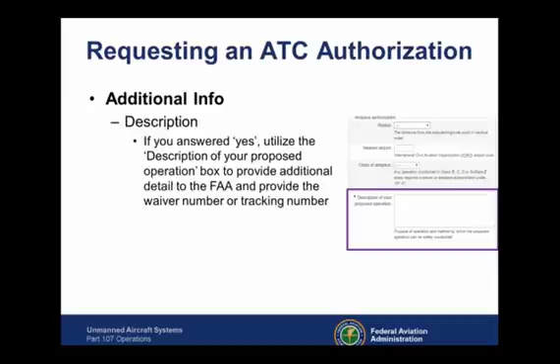Just like a waiver, you're not going to be some sort of terminator sent back from the future to destroy everyone. So verify you're not a robot, click submit, and away it goes.

And just like a waiver, don't get too worried if you don't get a response back right away. In fact, don't expect a response back right away. Let the system come up to speed here in the next couple months and we'll get there. I know it's not perfect. I know you guys are itching to go right now in all these classes of airspace. You're frustrated with the FAA because it seems like we're moving slow. I get it. But you're going to have to give it time. It's just going to take time to make sure that everything's done right and it's done safe.

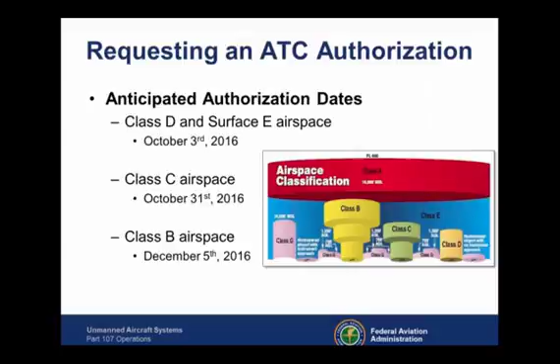All right, going to be wrapping up the quiz here pretty quick. I'm going to close that out now. The answer is false. 88% of you got that right. It's not the fact you're being paid or compensated. Certainly that is one component of being considered a commercial operator under Part 107. But remember, if you're operating in furtherance of business, realtors, I'm looking at you. If you're operating in furtherance of business, that's considered a commercial operation. Even though nobody necessarily is paying you directly for that UAS aerial shot, maybe they are, but even if they aren't, you're operating in furtherance of business.

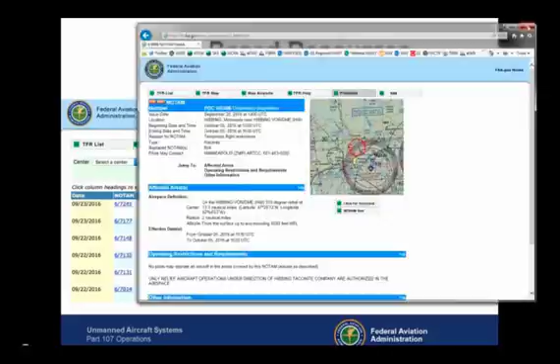Before you go fly, manned aircraft do the same thing. Before anybody flies manned aircraft, always check TFRs. I'm going to drop that off the screen and go on to my next one here.

Now this next one - I should preface this by saying I'm not advertising anybody's online chart system or tablet-based chart system, but SkyVector is just one of many online resources where you can look at sectional charts. Just Google SkyVector and it'll come up. It'll even show you NOTAMs, or DROTAMs as they like to call them. You can also see that sectional tab I was talking about with restricted airspace - click on viewing a sectional, scroll over to the side panel, and you'll find your restricted airspace in there, along with the controlling agencies. SkyVector works, there are others - I'm not endorsing them, it's just one of many.

Aviation weather - if you don't know this website, you should Google Aviation Weather Center and get used to it, because that is your primary source for aviation weather. As a remote pilot in command, you are required to understand current weather conditions, and this is where you can get them. You have to be able to understand what a METAR and a TAF is, and if that made you scratch your head, time to hit the books. You've got a test coming up, you need to study that. But you need to be able to decode that because it does apply to your UAS operation.

Know Before You Fly is another good website. In addition to commercial stuff, it's got hobby stuff on there too. It's kind of an industry-developed website with a lot of good information. Highly recommend going through that - it will give you a good idea of what you should know before you fly.

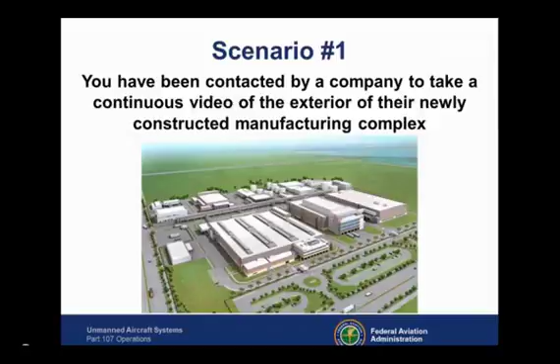You have been contacted by a company to take continuous video of the exterior of a newly constructed manufacturing complex. I want you to make a couple of assumptions here - let me get out my magic drawing pen. What the company wants is an exterior shot, continuous, all one video, coming around here. Let's assume you've got a UAS capable of that flight, battery and camera-wise, and that it's capable of doing a handoff via another control, passing from one control to another. Got to make those assumptions for this to work, because I do have a point to make, believe it or not.

So assuming you've got the appropriate UAS and can do that mission with the software and hardware you have, here's where that manufacturing complex was just built. By a show of hands - and you're going to need your little grab tab here to use your show of hands - how many people would say that they do not need to contact air traffic control prior to operation?

So what I'm waiting on is you guys to all raise your hands, and I'm going to see a percentage on that, and then I'll give you the answer. I'd really like to make this more interactive, but with as many people as we have in the webinar, I'm a little limited, so apologies for that.

All right, so people that have raised their hand, again the question is, do you raise your hand if you do not need to contact... did I say do not need to contact? Jake, can you help me out with that? I'm sorry, Kevin, I was looking up something else. Go ahead, Jay say it again. I wasn't paying attention either, so neither of us is listening to me. That's all right. My point is, guys, it's getting late. I'm sorry, you've been troopers for hanging with me. This is dry stuff. Man, I'm up to my elbows in the rules right now.

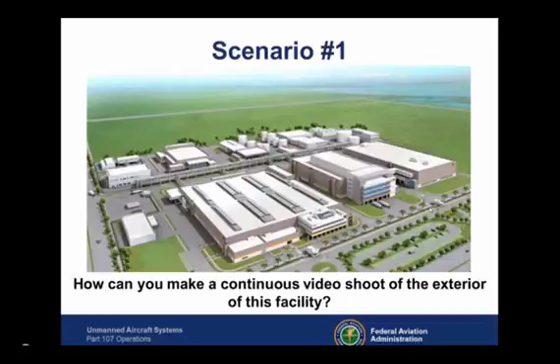I did see pop up, why not use a visual line of sight waiver? That's a possibility too—you could apply for a waiver and do this beyond visual line of sight. Absolutely great question.

Now I'm going to add a little bit to this. They want you to film a couple of towers they put up there. There's the towers on the map, and you're going to have to do some math here. Generally speaking, what's the maximum altitude over a structure we can fly a UAS if we're within 400 feet of that? Answer: 400 feet. If a structure is 1,000 feet tall, we could fly up to 1,400 feet AGL and still be in compliance with Part 107, as long as you're within a 400-foot radius of that structure.

Answer: yes, you could. How high could you go though? Remember, the cloud clearance requirement is that you have to be 500 feet below any cloud. So if the cloud layer is at 1,200 feet above ground, and we have to be 500 feet below it, simple math gets you 700 feet AGL in order to maintain cloud clearance requirements. So while the rule permits you to go up to 400 feet over this structure, which is 450 feet AGL tall—meaning by rule I could go up to 850 feet—the clouds that particular day are going to restrict me to 700 feet.

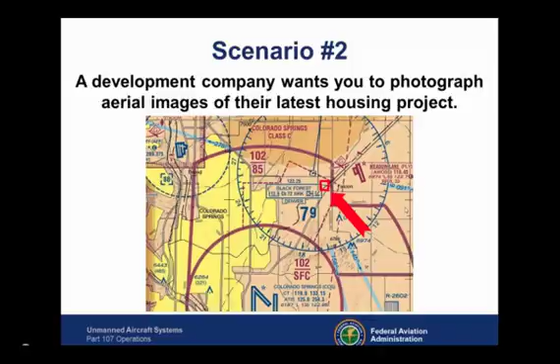Absolutely, and I'll get on my little drawing tool again here. The reason air traffic clearance would be required is because there's that dashed magenta line. Okay, now what airspace are we in? We are going to be in Class E airspace to the surface. Let's say we're not operating above 8,500 feet MSL here, so we are going to be in Class E to the surface. That dashed magenta line is referencing Colorado Springs Airport - that is their extension of Class E to the surface. Because we're within that Class E to the surface area, authorization from air traffic control is going to be required. So before you even get close to doing this, you're going to want to request authorization from air traffic control. That is how you want to use your airspace sectionals and understand that.

So what else do we check? We check weather - we're remote pilot in command, we're flying an aircraft, we're pilots, we check the weather at all times. And we also check TFRs. So according to the TFR check, there are 0 TFRs in Colorado, so I don't see any reason I can't fly due to a TFR.

All right, we're like at 6%. That's absolutely right guys, because that visibility is being reported at 2 miles, we may not operate under Part 107 unless, as one of our astute viewers pointed out earlier, you've got yourself a waiver to that rule. But we have 2 miles visibility, so we can't do it - at least not at that particular time or that particular day.

Here's another scenario. A wakeboard school has hired you to film their students from their boat with your UAS. Okay, they want you in the boat, they want you flying your UAS from the boat as they're pulling their wakeboard students. All right, seems like a reasonable request.

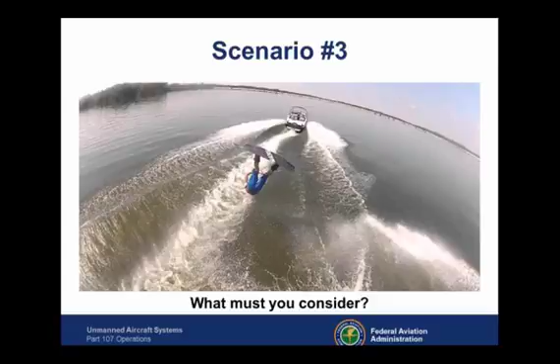Before you have to submit your blood alcohol content, we don't have a rule specifically that states that you need to do that, but most states require it when operating a vehicle. In Minnesota, they consider a UAS a vehicle, just like an aircraft, they consider that a vehicle. You would have to submit to a breathalyzer or blood alcohol test from a law enforcement officer. So if you are approached by a law enforcement officer, that's probably not the best time to try to pretend you have some sort of diplomatic immunity. I would comply with them and work with them on that, because I can't speak for every state, but I know certainly in some states, Minnesota included, it's certainly required to do a breathalyzer test.